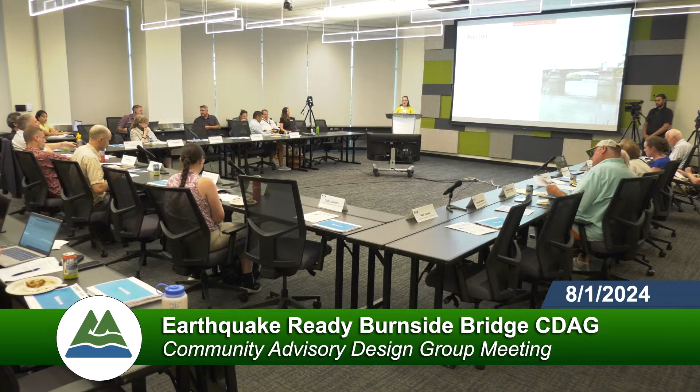So we are going to quickly go through our housekeeping items and then get to the good stuff that you're all waiting for. I just wanted to remind you about our agenda today. We will quickly go through the housekeeping items, and then we will be going into, and I think this might be slightly old, but I think we're going to do some cost data first, and then we're going to hear from Beam. Keith came all the way to see you all in person again. And then we're going to hear about the public outreach results.

And then we have 40 minutes to talk through today. Really, we're trying to get you the data we know that you'll need in order to make a recommendation to the staff and the Board of County Commissioners on a bridge option to move forward. We know that there might be additional data that you all need, so we want to collect that so that hopefully we can come back next week with that data. And then eventually, by the 15th, we'll make a decision on what to move forward. So that's our plan.

Really, it's starting the tough conversations and the hard work to try to narrow down from about 6 options to 1. So that's what we're intending to do today and Thursday.

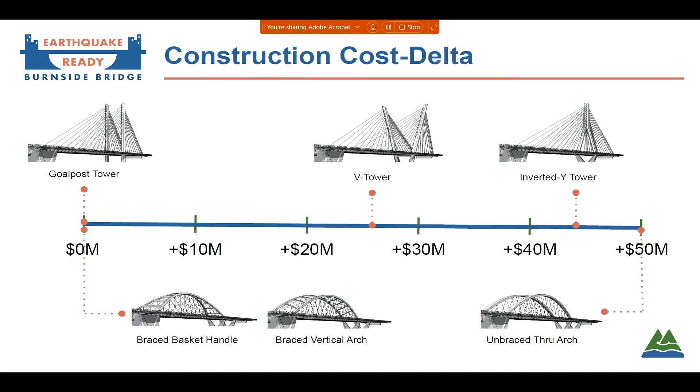I also want to remind everyone that of all the options our design team produced, we ran those through a screening criteria that included cost, schedule, constructability, risks, and impacts to the public. All of these met those criteria, and those criteria were meant to bracket what we could fund - what we think we could reasonably build. So all of these options are on the table.

The county feels like all of these are within the fundable range, but we heard that having this data might be useful for your conversations. So that's really the intent here, but all of these are acceptable options for the county. In addition to this, as Brandy mentioned, we'll also get some input from Beam, and then the summary of the public input we've had over the last month. So this is just one piece of your puzzle to look at.

Any questions about this? Yeah - there were a couple different versions of some of these tied arch bridges that were longer. Should we add another X million to those longer options to account for that longer span, just as a rule of thumb? Is there a way for us to gauge where they would land on this scale?

Of the two longer options, there was the basket handle and the braced arch. There was no longer option for the unbraced arch. Those are sitting around an extra $30-ish million mark. Thank you. Yep, awesome.

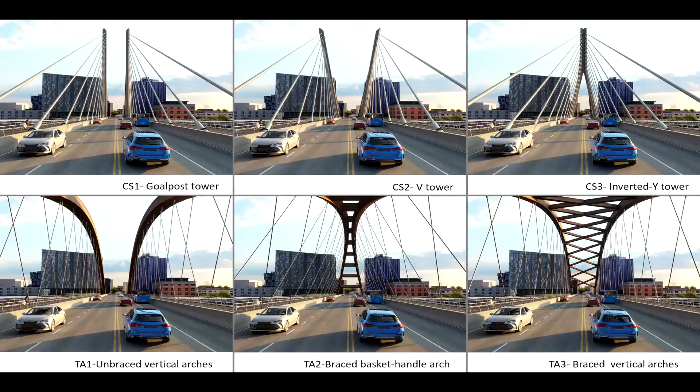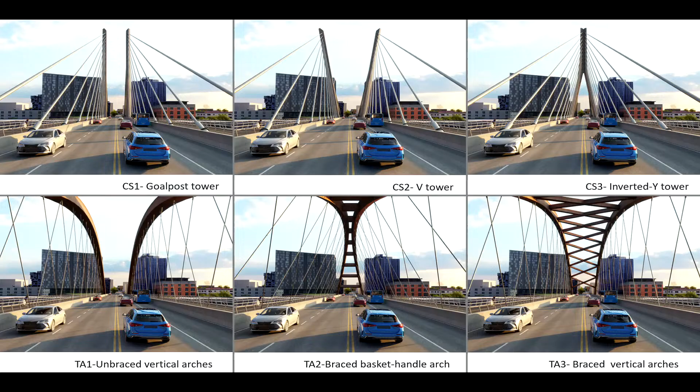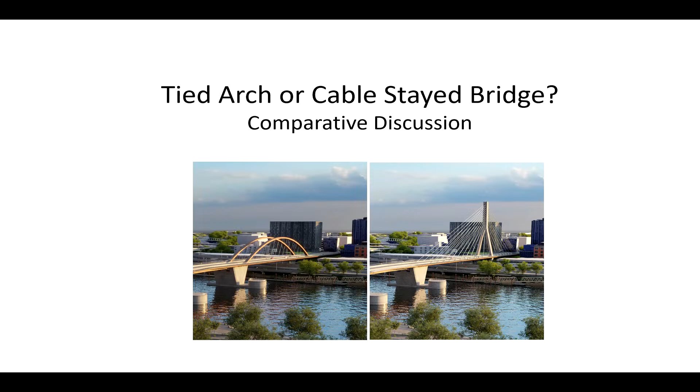So there's a long way to go in the design, and whichever one comes out on top of this game will be better than you see it on the screen. So next slide. I mean there are six, but generically there are two types, and if one were to break it down, it's trying to differentiate between whether it's an arch or a cable stay, as opposed to which arch and which cable stay. So I just want to run through some differences. Next slide.

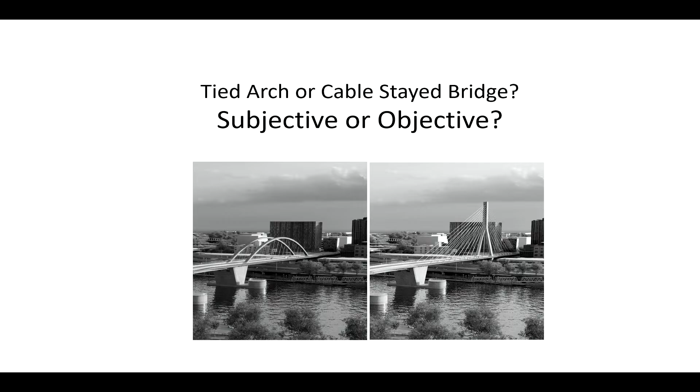Okay, well that's not the slide I have in front of me. So could you go back one, please? That's okay. Well, subjective or objective? I mean, I suppose that subjective is what your gut tells you, and the objective... well, I can put it this way, it's what I tell you, I guess, because there's a lot of complexity that goes into designing something like this that doesn't come out in pictures. So I suppose if I would phrase it like this, that you shouldn't choose entirely from the pictures. Next slide.

So here's a question. Let me tell you the answer to this. Yes, right, and this is what I mean about being objective, because subjectivity tells you that inherently people do prefer arches. Next slide. I know this because I've designed a lot of bridges and a lot of arch bridges, and there's a kind of formulation that if the public are involved, there's a kind of 3-to-1 ratio of preference.

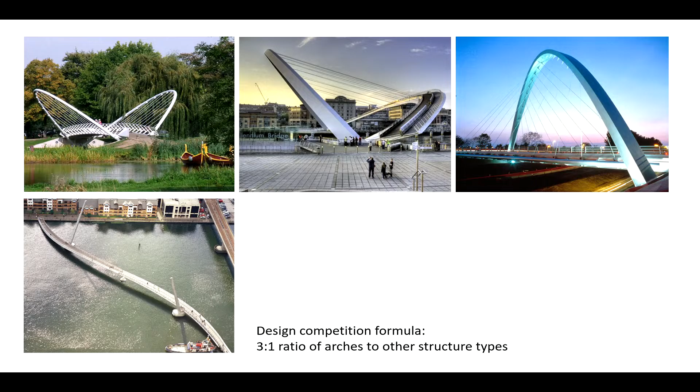I don't know what the public vote would have been, but I'm guessing I could have saved the county a lot of money by telling you that it would be a 3-to-1 vote. It may not be, but that's what I'm predicting, that there would be a slight preference. And I'll tell you why. Next slide.

There's a general perception that there's a sort of anthropomorphic thing about arches. They're curved. Everyone loves a curve. I won't ask you to choose which Coke bottle you are, but I'm on the right-hand side of the scale, not in a good way. They're comfortable insofar as they're not challenging, because we all know what an arch looks like, and from that point they're recognizable. They're common, by which I mean they are everywhere. So they're not distinctive, in the sense that if you build an arch over the I-5, people on the other side of the planet won't say, 'Oh, that's the Burnside Bridge in Portland,' because it's an arch. And they're also perceived to be historic, which they are, of course. The Romans weren't shy of an arch, but what I don't think that means is that they're historic in terms of context. They're not the natural fit to every historic scenario.

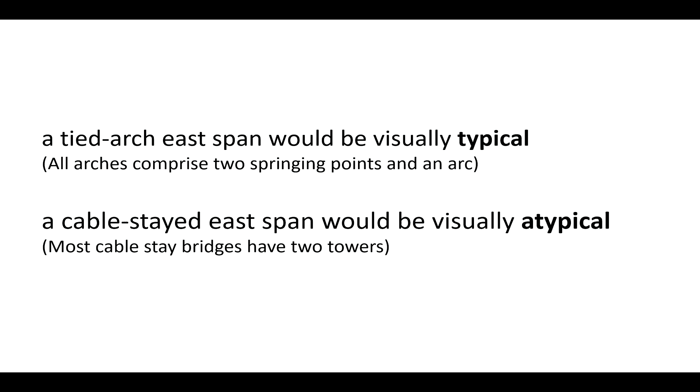Just in terms of comparison, an arch would be typical because an arch is an arch. An arch requires 2 springing points. It's got to land on both sides of the arc, with an arc in between them. But a cable stay bridge in this scenario would not be typical, because most cable stay bridges, like the Tilikum, have 2 sets of towers.

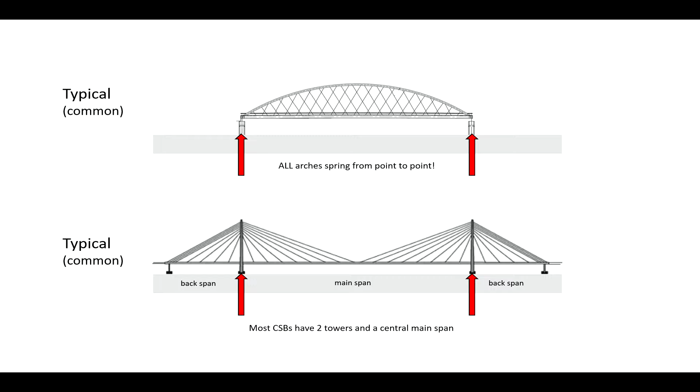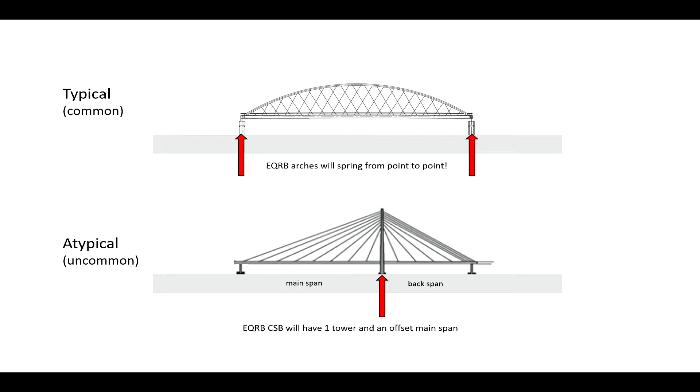Here's a typical arch, and here is a typical cable stay, but we don't have that. We have this, and that immediately creates a distinction between a bridge on this site and a bridge on any other site, because the main span is on one half and the back span holds the main span up. So there's immediately a rise in the distinctiveness of a cable-stayed bridge in that scenario. They're not very common single tower scenarios.

The other thing I would say is there's a great difference between the two, without any bias to one or the other, but there's a great difference in the visual field. An arch is end to end - you get a very palpable sense of what it is. Whereas the cable-stayed bridge, yes, it has cables, but its main visual focus is on the tower, so it's a visual punctuation. There's a great difference in the visual mass between the two things.

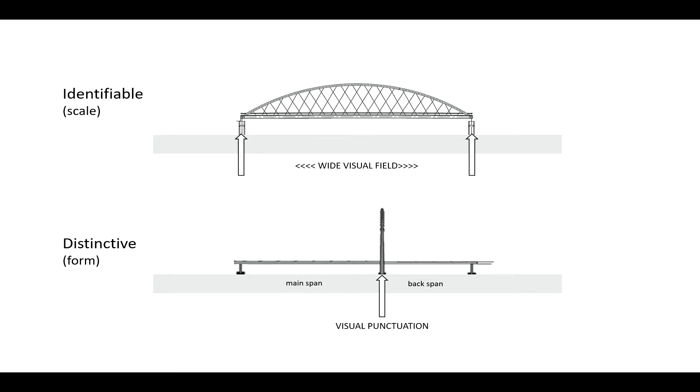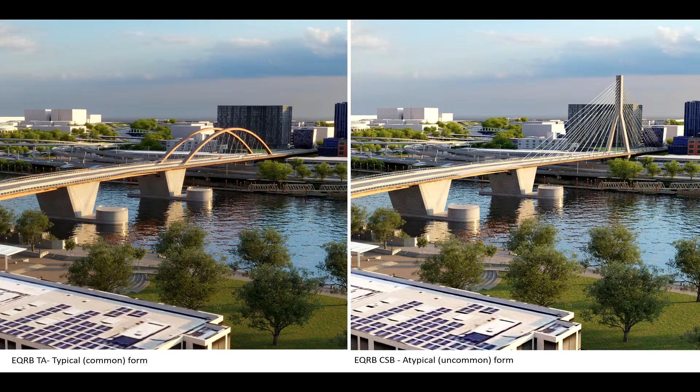Well, there you go. I mean, it's the difference between - it sounds negative - the common form and the uncommon form.

So there's something curious. We've talked a lot about the celery stick, right - this idea that you have one bridge, but you also simultaneously have three bridges. On the east side, that bridge has one job to do, which is crossing the I-5 railroad corridor, which you see in red. But as a quirk of this situation, because you can't put your feet down on the east side of the Willamette due to the ground condition, that arc spans over the river as well. So you get that kind of curio where it's doing a bigger job functionally than is necessary.

I've already talked about the visual difference in that punctuation on the cable stay - one is visually heavy, or at least relatively, and the other is visually light, relatively, because there's a great difference between a 10-foot wide steel arch and a 6-inch or 9-inch diameter cable. So that area of the river is spanned by something with a visual determination at the top and a visual shyness at the bottom.

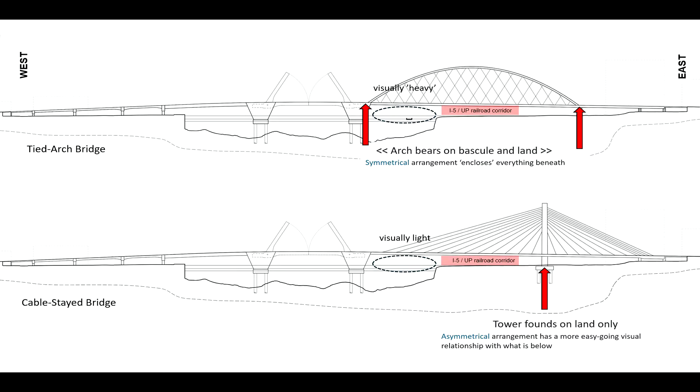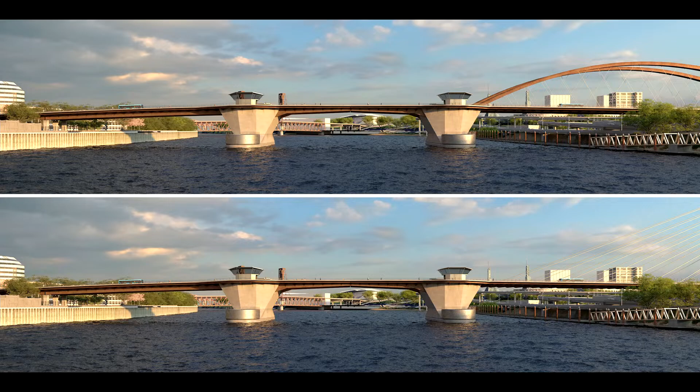Now, if I were to leave now, I've got to the point where I think this is the most important slide I will show you. So that's the difference - you get, on the right-hand side of the screen, between the cable stay at the bottom and the arch at the top, a very, very different visual impact between the two.

I'll just mention in passing that we are doing a lot of work on the shaping and demeanor of the bascule chambers, those big concrete in-water piers. This is where we are at the moment - not all of the images you see will reflect that, but this is where we're going. And if I were to use a phrase - these are big things, and the visual impact of these is major, so our job is to tame those visually, give them manners.

So just to concentrate on the arch for a moment, you get this slightly disconnected superstructure coming in from the east and landing on the pier.

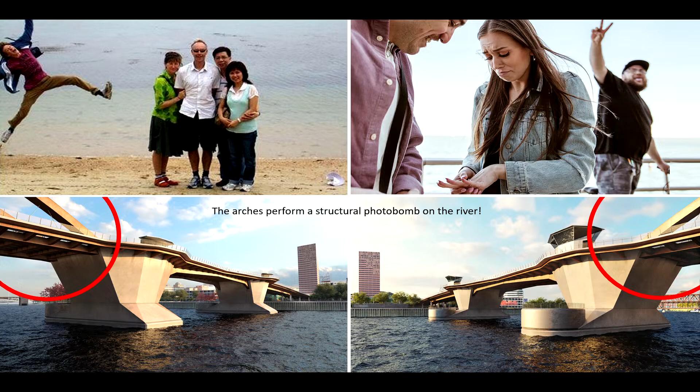And what that seems to me, at least, is that you get these things, you wonder what they're doing, and they're kind of charging over from the land and hitting the water. It's like a photo bomb. You get a slight feeling that the thing coming in from the east probably shouldn't be there.

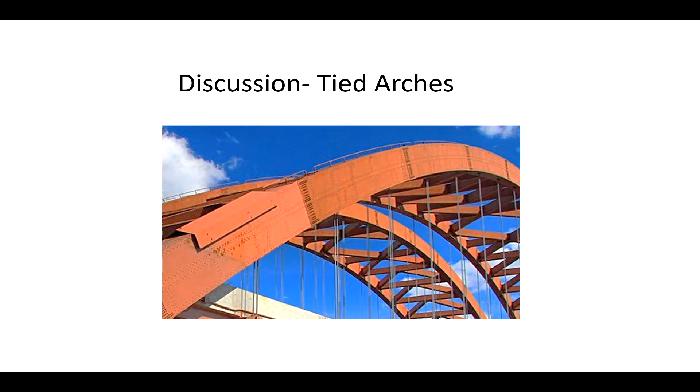Just a few things on this. I'll do the arches first, and then I'll do the cable stays. So I'm going to talk about the shaping of the arch, the material, and the construction. We've talked about this before, so there shouldn't be too many surprises, but we'll see.

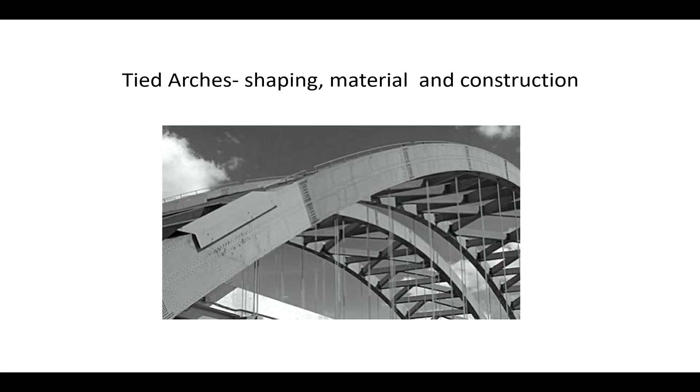This is not what it will be. This is a bridge that we designed in Washington, D.C. It's painted steel, longitudinally welded, so it's seamless. As you can see on the top left there, it's got this quite distinctive shape that changes over the length of it - we're playing with that for structural reasons. It's only fat where it needs to be, and slender where it needs to be. But that shaping does an awful lot for the visual perception.

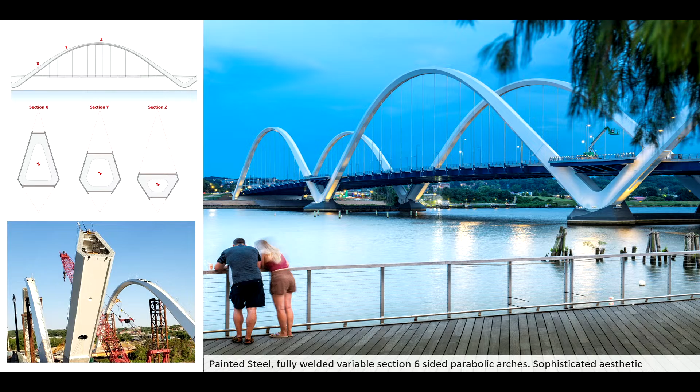Here's another example, this one's in the UK. I think you can see on the right there the way the light and the shadow work on that. These are important aspects. That arch is shaped like a kite.

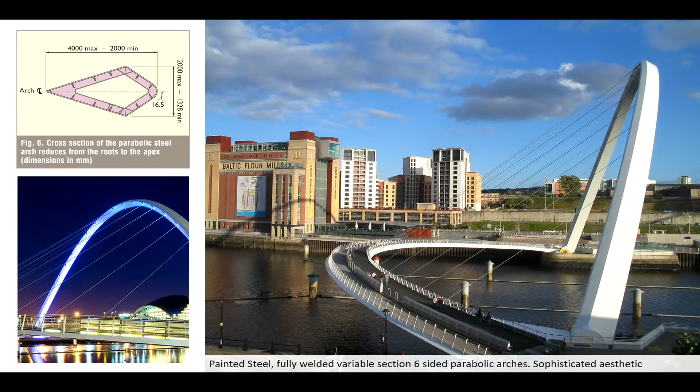There's a worry here: in the US you don't have a mature welding culture, you bolt things together with splice plates. We have a weathering steel arch here. I think that's the right decision, but it's a decision that doesn't come alone, and we can debate that. But if the devil is in the detail, there's a worry that the arch in your mind is not the arch that's going to be spanning that obstacle.

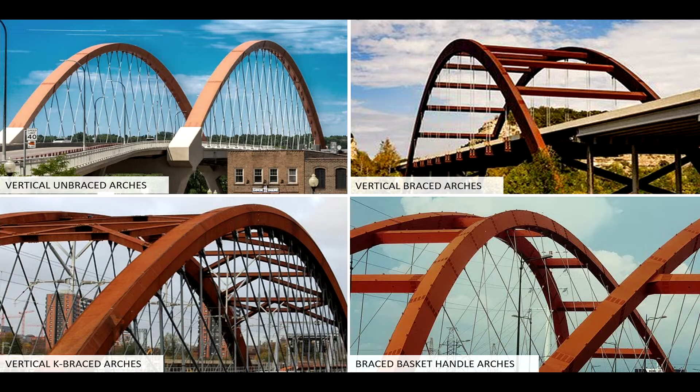There are lots of examples, some good, some not as good. Here are your types - there's four because three doesn't fit nicely on a divided screen. There's a future discussion about the bracing: the bottom two, top right and bottom left, are braced but in different ways, and we'll come back to that. You can see on all of those, perhaps with the exception of the one on the bottom left, that they're all bolted - and that's because the one on the bottom left is not in the US.

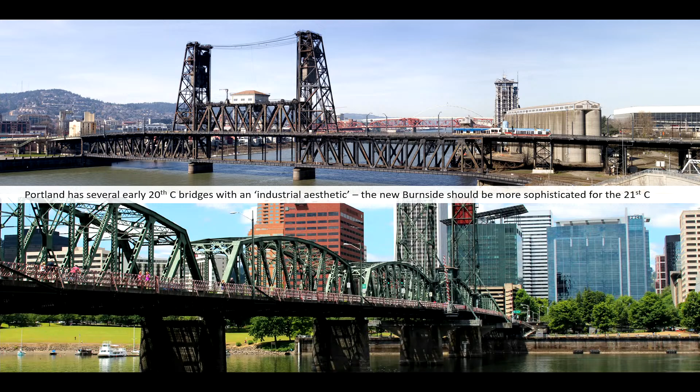So when you add up the material and the construction methodology, you get what I might refer to as an industrial aesthetic, and that may be something that you want. My opinion is that some of the great bridges, particularly the steel bridge as a kind of engineering powerhouse, is of its time. To build a new bridge that is not of its time is not doing justice to the site and the time in which you're building on it. So there's a kind of plea for sophistication, I think.

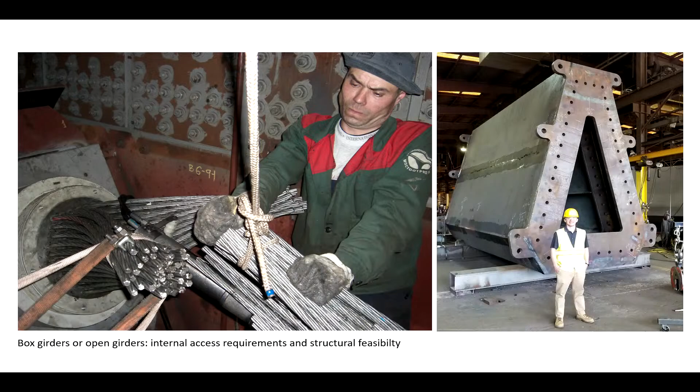I'll gloss over this quickly, but just to say it's a big structure - the one on the right there, he's not a very small man, it's just a big arch. That is the bridge in Washington. But the box structures, we will have a box structure, which means you need man access inside of it - which is one good reason it needs to be weathering steel, and that needs to be accessible, maintainable.

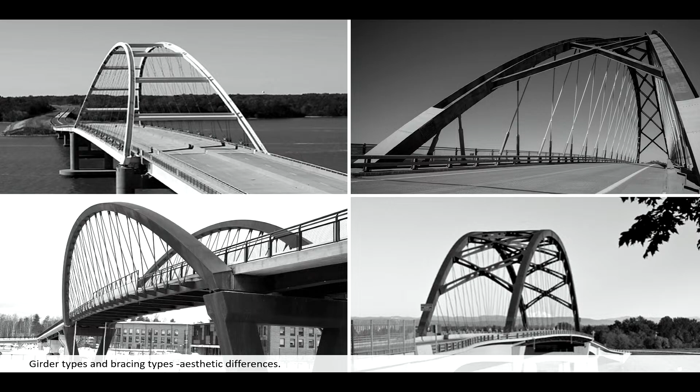But it's possible in some of these arch scenarios that we might be able to dispense with the idea of a box and go with a girder structure. That might sound like a downward step, but I think it's probably a positive step, because if you have a girder, you've already got this level of articulation, which I think is enjoyable. So you don't need to start trying to change the box to get some joy out of it - you get part of that joy out of the girder. There are good examples and less good examples, but we can work towards that.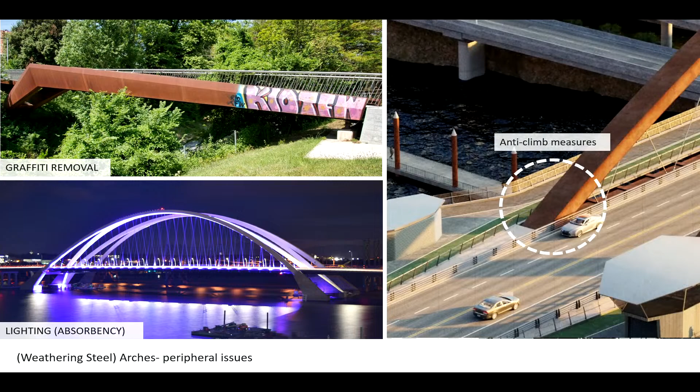There's also a climbing risk. That's the bridge in Washington on the right-hand side. That chap stayed up there for 2 days, which was a bit of a feat. And there is a climbing issue.

Part of my job is to get rid of stuff, right? The less stuff you have, the better. But I think in this case, because that arch reaches over and lands on the in-water pier, there's almost no choice but to start sort of caging that end. So we'll be adding stuff, not subtracting stuff.

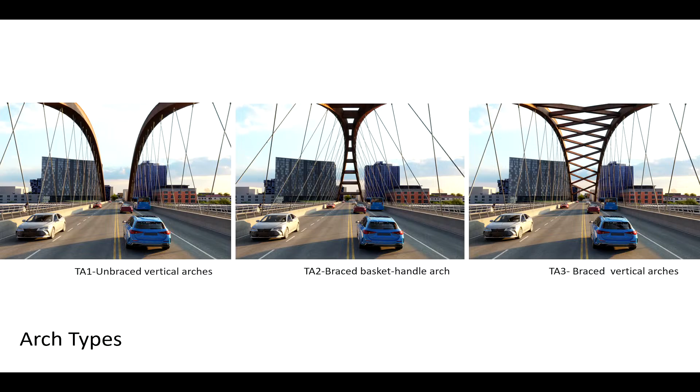Okay, next slide. So there are 3 types, as you know. I'll just make 1 or 2 points on this. You've already heard that there's a sort of cost. This is rather typical, that the simpler things are, quite often, the more expensive they are, because it takes a great deal of effort to take enough stuff away for them to be elemental and simple.

I'm rather keen on the unbraced arches. I think this is the best of those, but the cost of that is literally cost, and part of that reason is that you've got 2 arches that are standing up on their own. They're not braced, so laterally, sideways, they have to be quite stiff. So they're bigger than the arch ribs in the other 2 types.

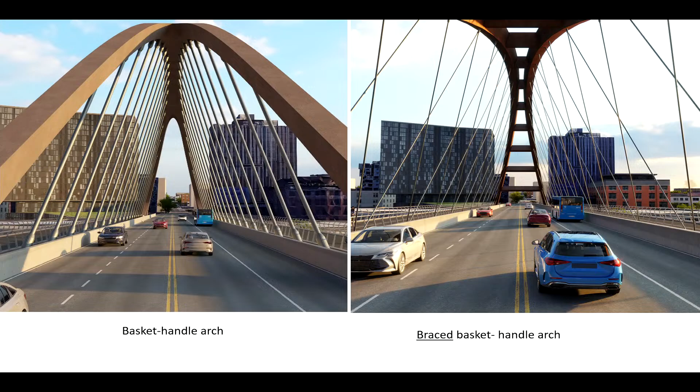Well, look, the one on the left is a throwback, and I don't want to dwell on this, but these are both braced arches. One braces against the other arch, and the other one not so much. It's braced via the medium of some cross bracing.

There's a great difference in the simplicity of those things. But this is a question of evolution, right? Were we to choose the one on the right, I think we would try and make it more like the one on the left, to take things away and make it simpler and better. I think we can, but we might not be able to get back to where we were. But just to tell you that when you have bracing, it's all about the bracing aesthetically.

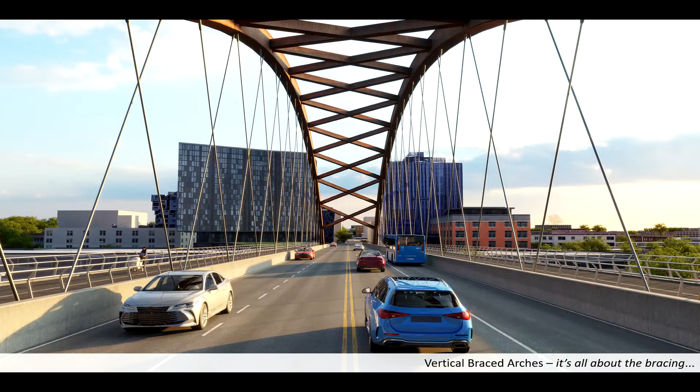So when you get to this point, it's only about the bracing. The thing that I'm looking at is the cross brace. I quite like it. It's a sort of girdle kind of thing, but there are lots of iterations of this, and I can't tell you the number of hours of my life that I won't get back in cross bracing studies.

So this is where we're at. My opinion is that this is probably the most common, and therefore the one that I'm least interested in, because I think this site deserves something that is above the baseline.

All right, so I need to explain my numbering here, because everyone that's looked at this has questioned me. Everyone has said, are the marks at the bottom out of 6? And I say, no, they're out of 3, right? So the Olympics are on. This is my gold, silver, and bronze.

But I'm not giving a gold medal, because I think that the unbraced arches and the basket handle arches are equally good, but equally challenged. I think they could be both made better. So they get silver medals. I think the braced arch doesn't get a place on the podium at all. So that's 5th out of 3.

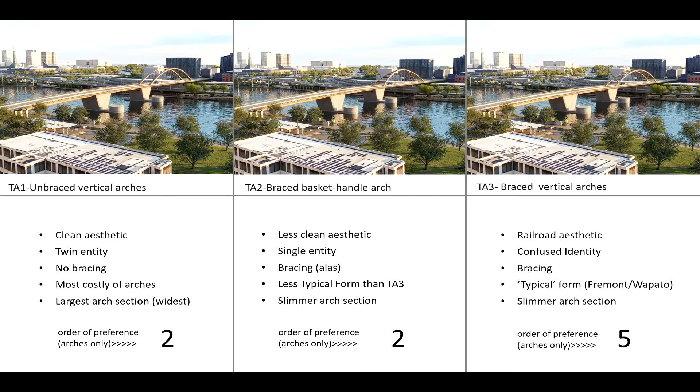I'm not going to read the words, but there are positives and there are less positives for each of those. And you have the slide, so I would encourage you to read those words afterwards, because there's another slide equally for the cable-stayed bridges, and those 2 slides are my opinion. So add these 2 to the list of most important slides.

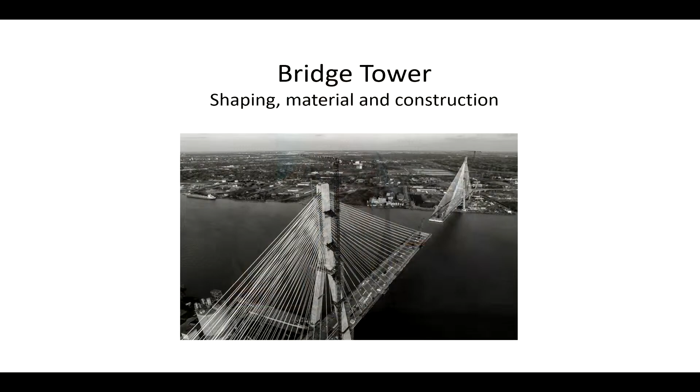All right, the same on cable-stayed bridges. Again, we'll talk about shaping, material, and construction.

Okay, so this is a bridge we designed recently that you can't see it, but this is effectively the equivalent of the goalpost scenario that you have here. But you can see that the kind of love has gone not into the overall shaping, but in the detail of the shaping.

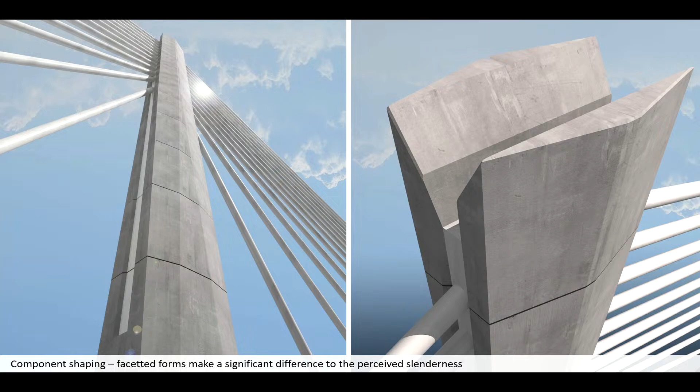I think the simpler the form, the more important that is on a cable-stayed tower. Here's another one, and I mean, the words say it really. Faceted forms really affect the way light falls across a plane, and it makes a huge difference to the slenderness. So the towers in our 3 options are not shaped, and whether they will be shaped is a question of constructability, cost, and other aspects.

But there's a hierarchy of necessity, and the necessity is greater, for example, on the goalposts than it is for the others. This is the Tappan Zee Bridge over the Hudson, where we're talking about that exact same thing: vertical tapering, migrating seams. Maybe the form against the skyline at the top of the tower will make a huge difference to the final outcome.

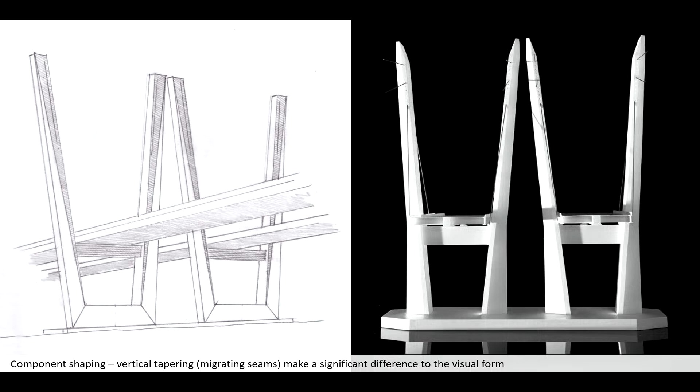A little bit about constructability. Both the V tower and the inverted Y tower come at a cost premium relative to the others, but there's a coefficient between cost and value. In my opinion, the value of doing something that isn't the goalposts is very high. The reason cost is in there is mostly because inclined structure is more complicated to do than vertical structure.

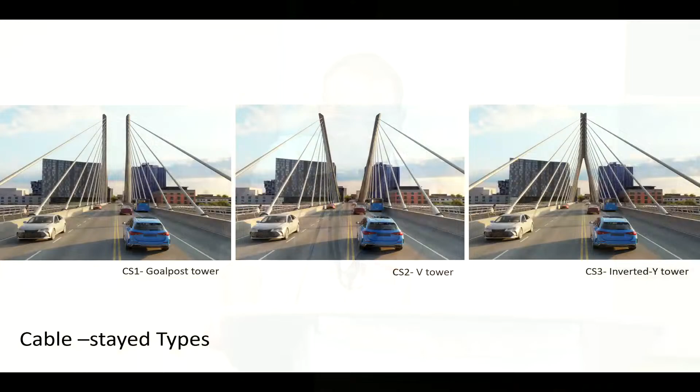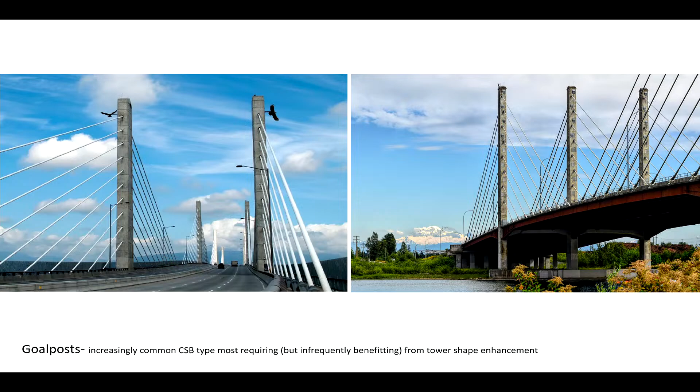If you extrude a shape up through, and you don't have to change your formwork or anything, it's very efficient, very cost efficient. Which is why you saw that the goalpost, reflecting an unshaped tower, was at the left-hand side of the cost matrix.

So there is the Tappan Zee, and you can see that it tapers and has a shaped top. But interestingly, both this one and the next one need less shaping, because at the macro scale they already have visual interest because of their overall shape.

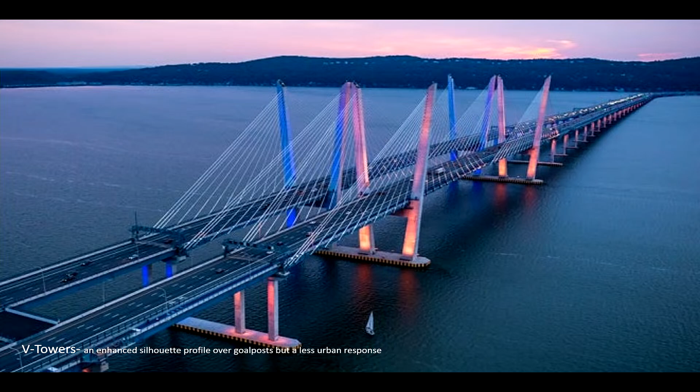And here is the inverted Y. I like the point that we're calling it an inverted Y because it starts with 2 legs and goes to 1, but that's only above the deck. Below the deck, it cuts back in. There's a very different experience below and above, and there's not really any point where you're seeing the thing as a whole.

The Tillikum out here, I very much enjoyed coming here because you get snippets of that bridge. There are places where you can see the whole thing, but it's more about the snippet views. I think it'll be the same at Burnside. Of the 3, this has the most interesting shape without being shaped in detail.

So here's my 1, 2, 3, which turns out to be 1, 3, and 5, because from an architectural point of view, I think there is clear water between those. If I start on the left-hand side, the goalpost—it's clean, and it's 2 sticks rather than 1 stick, but it's not novel even in Portland. I've used the rather bold word boring. Someone else might call it simple, but I think it offers less than the site deserves, in my opinion.

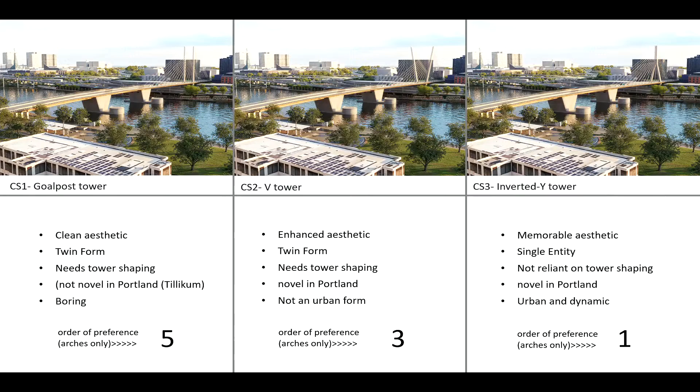Which puts, from an architectural point of view at least, the inverted Y tower as a clear favourite.

So, in terms of preference, I'm pretty clear. I think that the goalposts and the braced arches are not enough for this important site. I've already told you what my preference is, which puts the other ones as less preferred. I don't know whether that's a negative or more preferred than the ones that are not preferred, but less preferred than the one that is preferred. You could think about that for a while.

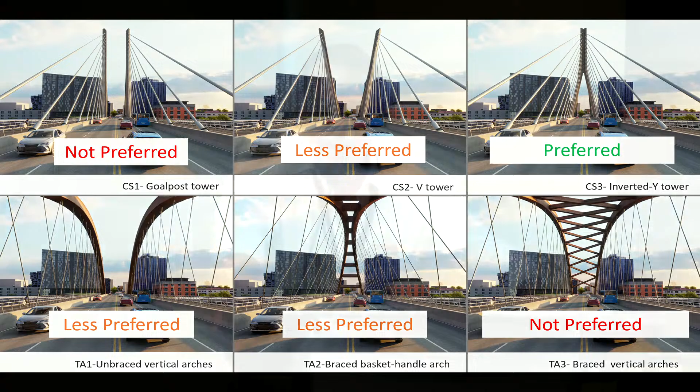Next slide. So I'll reiterate the words at the top. This is the preference of BEAM architects, which may not reflect the preference of my sponsors. I quite like this slide because, and I think this is one of several reasons that we prefer this, is that view, which occupies the gap between the yard and MLK5, is a country mile better than the response of all of the other types.

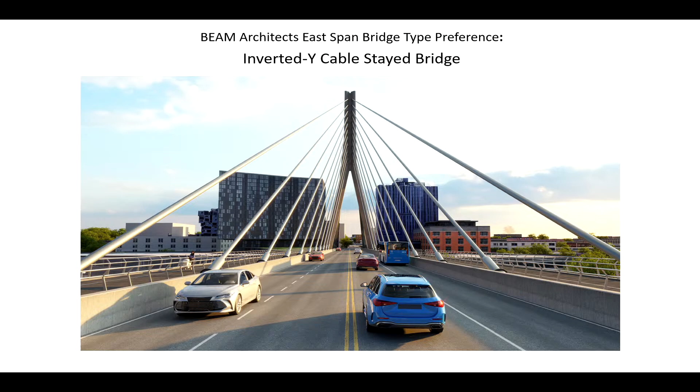Next slide. So, I might read out some of these. I think it's an urban and an urbane solution. I think it's quite sophisticated, and I think it's quite modern. I think it's a sort of 21st century solution rather than a 19th century solution. It doesn't have that industrial aesthetic, and unlike all of the arches, it doesn't photobomb the river, which is important, I believe.

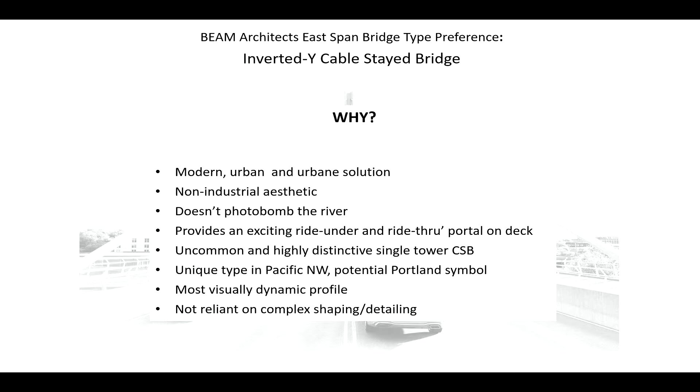I think it has the best ride-through experience. I think the last image demonstrates that. I think it's pretty unique in the Pacific Northwest. I mean, it's pretty unique anywhere. So to go back to that idea about one tower rather than two, I can't think of another one anywhere.

And when it comes down to it, I don't think it's reliant on complex shaping. So the overage might narrow. I do have to say, I think it's over robust in the way that it's been represented currently, and it will get better, like all of the others will get better.

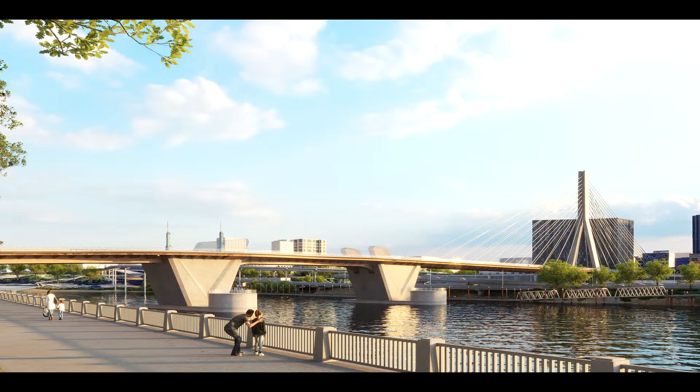Next slide. Okay, so I mentioned earlier the shaping on the in-water piers, so this is not a true representation of where we are at, but I do think it just gives you a clear narrative about the individuality of the East Bridge and the continuity of the deck as it runs through. So your eye is going in the horizontal line, not as it would in an arch, along the horizontal line to the far pier and then up and over the arc of an arch bridge. This is a very clear difference.

That probably is my last slide. No, it's not. I'm going to remind you. Next slide. Just a reminder, okay? This is the most important slide. And I know the next one is the end because I've written the words 'the end' on the next slide. So we better go to that one. There are some more slides. When you have Q&A, the comparative views that you saw last time are available, but I'm not going to talk to them.

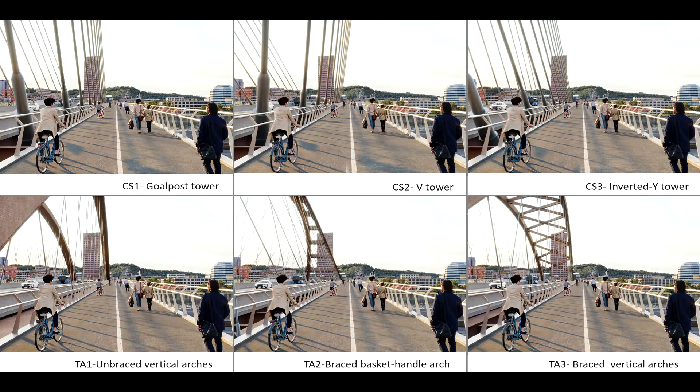Approaching the bridge on foot from the east side, you walk a full 6 city blocks before you have any opportunity to get off the sidewalk. That's a long way on foot. And if you're actually going to the Waterfront Park, you walk 8 blocks to get there. I really think that somehow we need to have the convenience, in Portland of all places, for pedestrians to get to and from both the Eastbank Esplanade and the park directly from the bridge on a staircase. This does not necessarily go against ADA rules, but I think it's essential in this community that we have proper pedestrian access. Thank you.

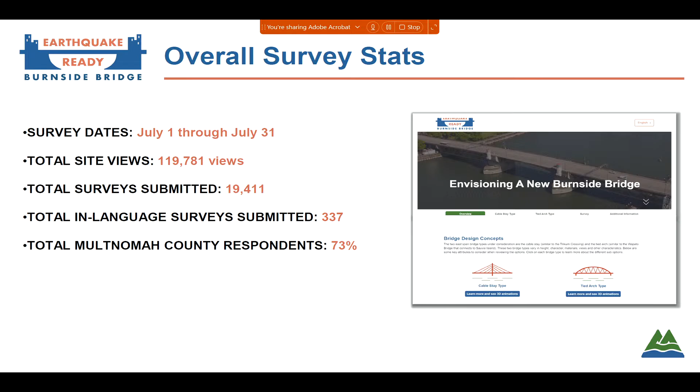Okay, so let's get into some of the data. I'm sure you guys are interested in this. Again, you see the survey and how long it was open. We had more than 119,000 views of the online open house and survey site. More than 19,000 surveys were submitted. Pretty excited about that number. And more than 300 in-language surveys, that's all of the other languages other than English. And then 73% of those who took the survey said that they lived in Multnomah County. They had to put in a zip code for that.

All right, so let's get into also some of the demographics of those who actually responded to the survey. You do have this in your packets if you want to look at some of the numbers closer. 78% of respondents identified as white Caucasian. A little more than 5% identified as Hispanic Latino. Nearly 5% identified as Asian, and nearly 2% African American, Black. Again, you have all the numbers in front of you.

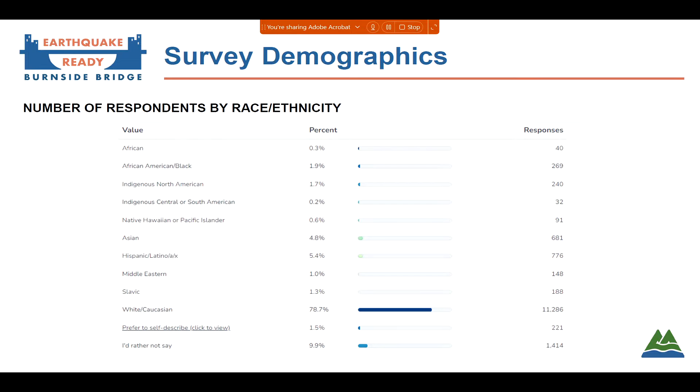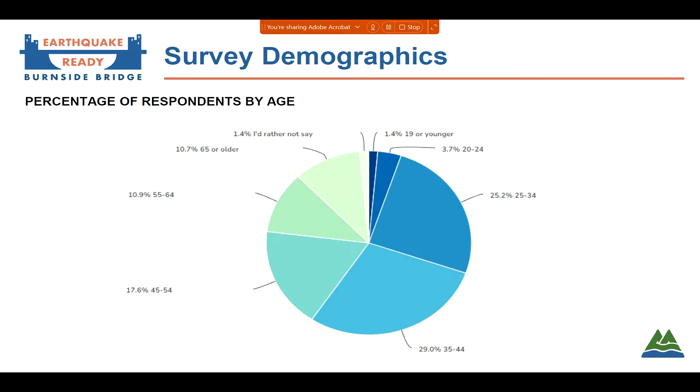And then let's also talk about age. This was pretty encouraging for our project team to see. 29% of respondents were between the ages of 35 and 44, the largest percentage. 25% were between 25 and 34, and a little more than 17% were ages 45 to 54. Historically we've seen older communities usually participate in surveys like this, so we were pretty encouraged to see these numbers with younger generations participating.

And then gender, it's pretty close. Nearly 46% identified as male and 43% identified as female, and then smaller percentages identified as non-binary or would rather not say.

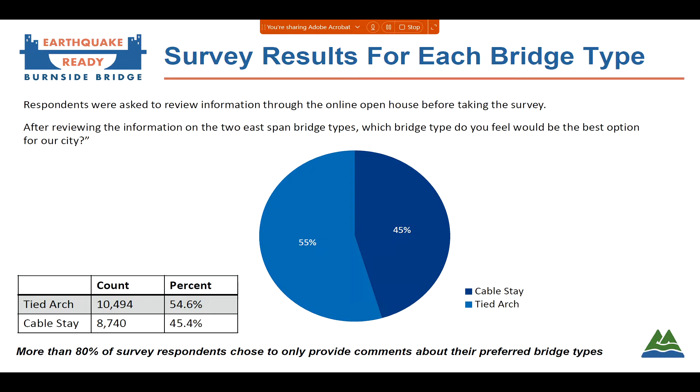Okay, so let's get into the bridge type specific data. Really close here: 54% of respondents preferred tied arch and 45% preferred cable stay. Another important piece to note is that more than 80% of survey respondents only chose to provide input on their preferred bridge type. So when we were talking about the survey, they could say, okay, I like the tied arch, but let me put some input in about the cable stay. 80% of those people said, no, I just want to say what I want to about the one that I prefer.

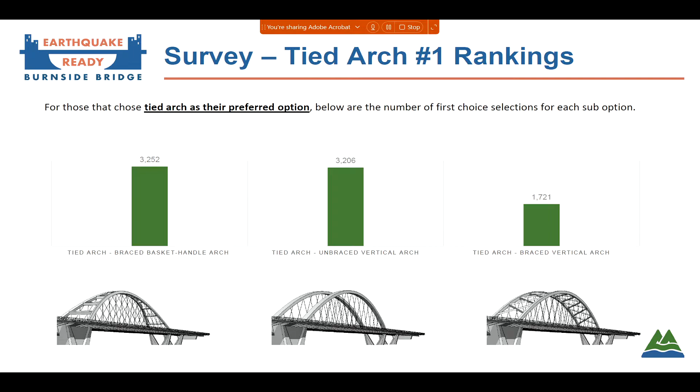Okay, so let's get into tied arch specific survey results. We're comparing just the number one votes — they could rank all of these sub options 1 through 3 each. For tied arch, the braced basket handle and the unbraced vertical arch were very close, within 50. Fewer respondents preferred the braced vertical arch. So pretty close between those two, the braced basket and the vertical arch.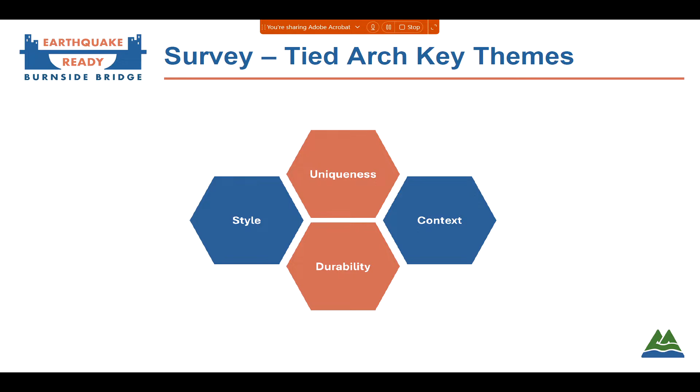So here are some of the key themes, the reasons why people chose tied arch. Uniqueness — many people noted that we already have a cable stay, the Tilikum Crossing, in downtown, and they wish for something more unique. Many respondents also talked about style — they preferred the tied arch because they think it's more aesthetically pleasing and more timeless than the modern cable stay. Context was another key theme. Many respondents felt the tied arch fits better in the context of its surroundings, like the east side buildings, skyline, or generally just ties in better with the city.

Some respondents like that it's more low-key and not as dominating of a structure. Quote, 'it looks like Portland,' was one quote we got from a respondent. And some respondents feel that the tied arch looks better with the asymmetry of structure only on the east side. The last piece is durability — that was also a key theme. Some respondents perceived the tied arch as more stable looking.

Okay, and this is the other piece I know this committee was particularly interested in — the tied arch long and shorter options. When we look at that, 62% preferred the longer option of those who actually responded to this question, and nearly 38% preferred the shorter option. We did want to note some important data here: just over 50% of those who preferred the tied arch option actually responded to this question. So 50% of the people who preferred tied arch said, nah, I don't need to say anything about the short or long.

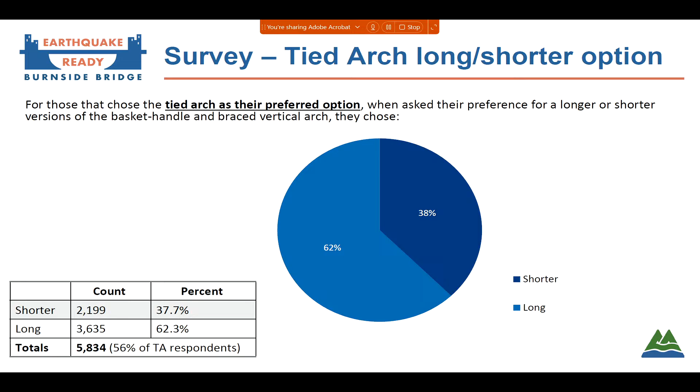And then here are some of the key themes for why folks chose the long or shorter versions. For long, style was a big piece of it — I like the idea of a more gradual slope. And landmark — many noted the arch should have more presence because of the Burnside Bridge's importance in the city. One person said, Burnside deserves something grand and traditional.

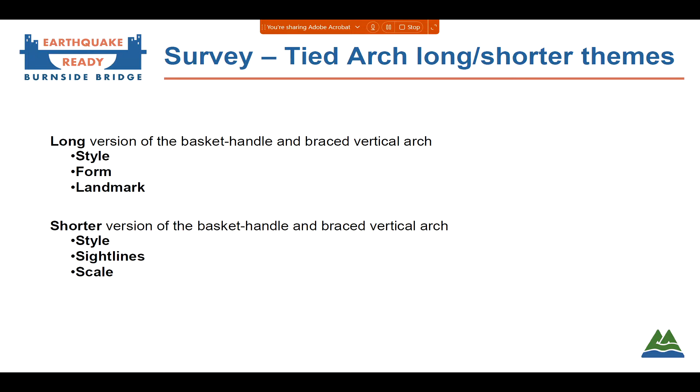So these are also number one vote comparisons amongst the 3 different sub options. Respondents preferred the V tower the most out of the 3, and then the inverted Y and goalpost.

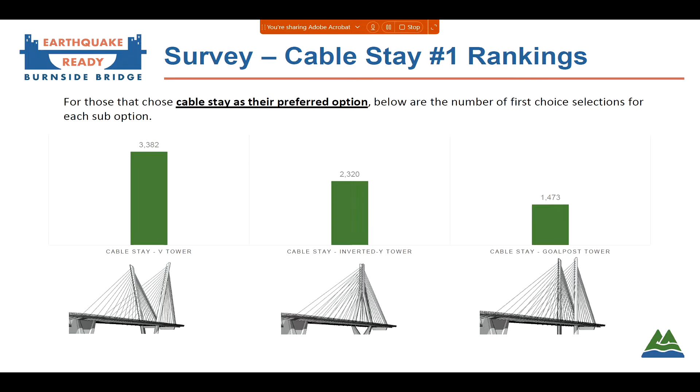And the reasons why folks preferred cable stay over tied arch. Respondents generally liked the look of cable stay — they said it was more modern, more dramatic. One person said, 'I like cable bridges, they have a cool vibe about them, it's simply more artistic.' Another reason was it matches the Tilikum Crossing — many respondents chose the cable stay because they like the similarity to the Tilikum Crossing. And uniqueness — despite the Tilikum Crossing, many still felt that it would be unique for the area.

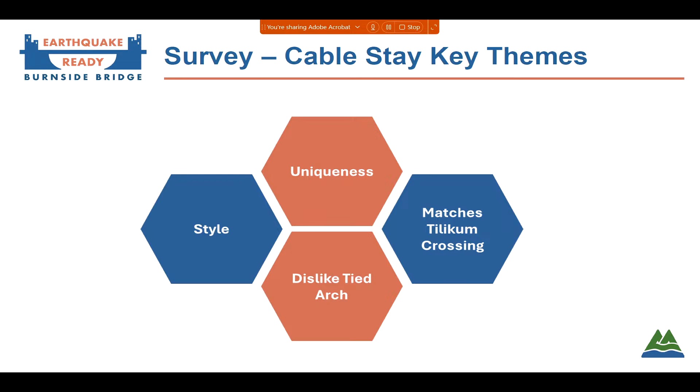One quote was: we have an opportunity to create a unique form and make it an icon in Portland. And then they just disliked the tied arch.

And then also, just to help folks understand, for the 7 different languages that we put the survey in, these are the preferences combined. So across all 7 languages, what did they prefer? We took all of those responses, and the cable stay V tower was the most preferred, then the inverted Y tower follows, and the goalpost after that.

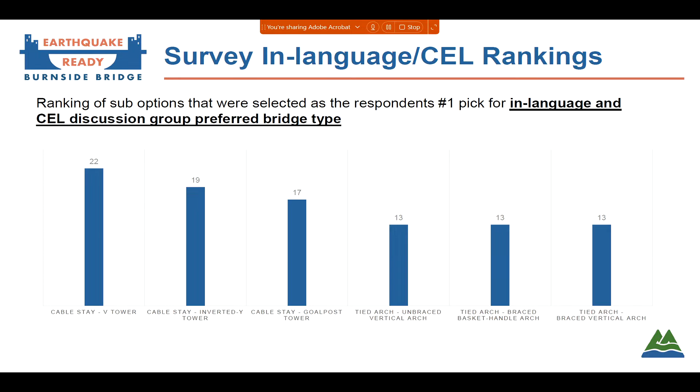Okay, I think I flew through that. Does anybody have any questions? Okay, great, perfect.

Okay, all right. So this is a lot of data, right? You may be kind of reeling from all this information. But again, the hope is that this answers some questions for you all as you start to have these conversations, because we know the ultimate goal is to get down to one bridge type, one option. So I wanted to start with: are there any surprises or anything you wanted to talk about from what you've just heard, or just some of your initial thoughts? We don't have to dive into all your thoughts right now, but just some initial feelings. So I see Jason, Valerie, and Bob.

Oh yeah, sorry about that. I just find it really interesting, the V tower settling out in multiple places as a top choice. I think it would be interesting if we could look into that survey data to find out why specifically people elevated that particular cable stay above the others, because that is not what I was expecting from the data.

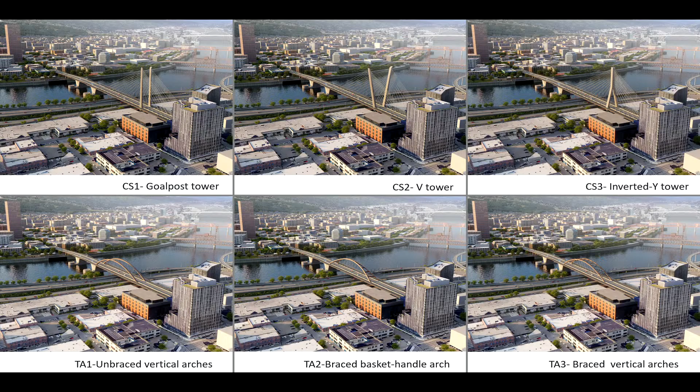That's a fundamental thing. A friend of mine made a great comment when we were working on the Columbia River Bridge. He said, with a setting like this, it's got to be a bridge that God likes. And that's a hell of a tall order, but it's got to be something that really addresses the river. And the tied arch doesn't. It simply doesn't. That may be a subjective view, but I hope it's helpful and constructive.

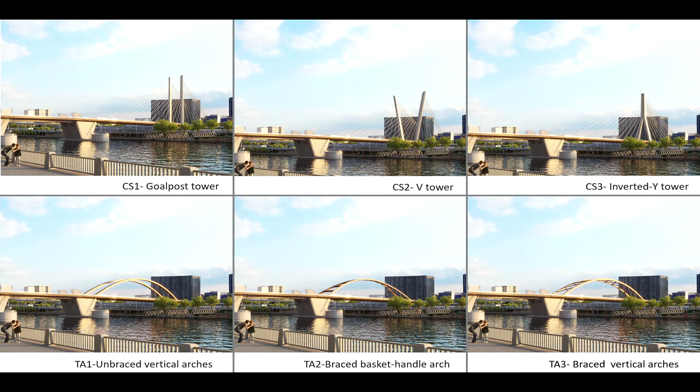Yeah. That's all. Yeah, great points.

I want to see, since we're getting near the end of our time together today - Aaron, what you were just saying about your job as the CDAG is to take all this data, right? You're hearing different things from the public, and this is all meant to help you make a recommendation.

So one question I have is, based on what you're hearing tonight - and it may be too soon - is there something you think we should not bring back into the conversation next Thursday? Is there one option, two, or more that you feel ready to pull off the table? I'm seeing some people looking a little hesitant about that.

But I just want to check, because I think it's going to be hard going forward, and all of it's going to feel a little difficult. I don't want to rush you in this decision, but I also want to take a temperature check and see where you're at.

Maybe just a show of hands - do you feel like there could be a conversation tonight about removing an option? Do you think you could remove an option tonight? Okay, I'm seeing about half of you saying you'd be comfortable with that conversation.

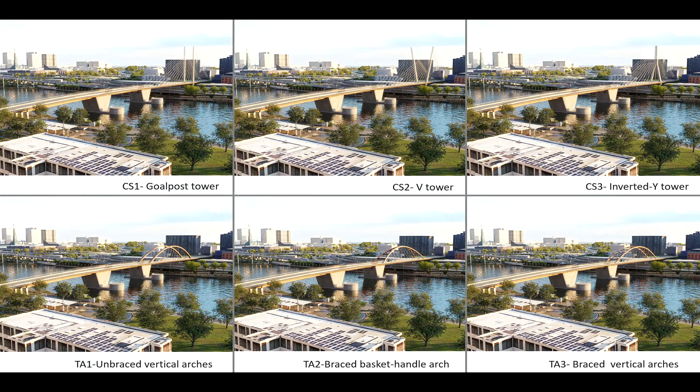So I think we heard from the public, and we heard about cost and professional opinion. What I'm hearing is kind of on the lower side, and I'm just going to throw this out here as a proposal: the braced vertical arch. Am I saying that right? The right one, the girdle, which I giggled about. I think that was... maybe I'm wrong, not expensive, but lower in public opinion and lower in the architect's opinion. So then we also heard... I don't know, I'm just throwing that out there as an idea.

If, I just want to check in with you all. Is there something that someone is like, let's get that off the table? Gabriel: What was the public opinion on the unbraced vertical arches? Because that was the most expensive design, and I don't know if anybody has a real hankering that that's the bridge of the future, but it seems like a prime suspect to just cut out.

Brenda, do you know? So the unbraced vertical arch, I think, was second choice for those that chose the tied arch as their preferred bridge type. I think in the list of 6... I don't know if we have that presentation, do you think we can go to it? They came in third, different from the top. I don't have the survey presentation in front of me because we didn't have time to print it. Yeah, they were super close, it technically was second, but within like 50 votes.

Of which two? The braced basket handle and the unbraced vertical arch. Oh okay, so those are TA1 and TA2. Well, yeah, okay, I think that's it. I think that's the slide we need, right? Yeah, there. That's the thank you slide. Okay, so it's that 3206 one right there, the unbraced vertical arch. So technically it was third overall among all bridge type selections.

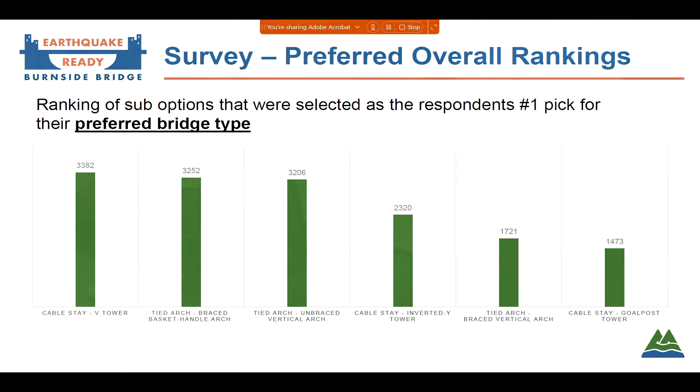So, okay, so with that, you all are leading this conversation. I'll push you as we get closer and our time gets more constrained. But I just want to check in, because that one, the braced vertical arch, was lower preference but also less expensive. Valerie.

And then Susan. I guess the one that you brought up was not one I was thinking at all about taking off the table. I was thinking, which is what we can see on the screen, the goalpost tower, because I haven't heard anything tonight that says it is somebody's top option. If somebody wants to correct that, feel free, but I haven't heard anything yet.